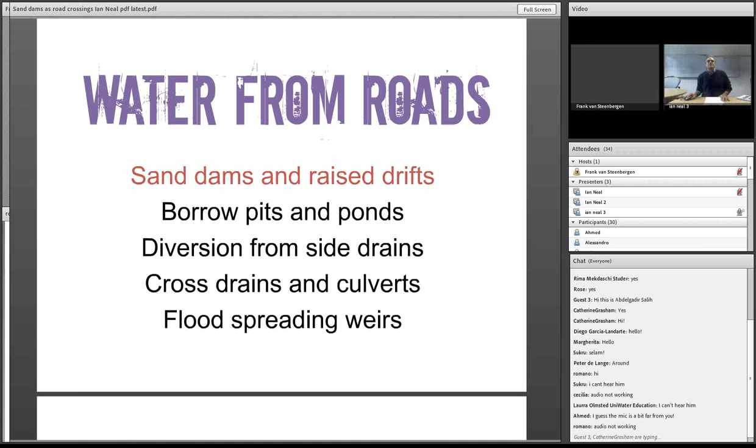So today we're going to look at what sand dams are, what is the opportunity and the scale of that opportunity, what are some of the benefits for local people and for road authorities, and later on we'll look at some of the barriers and enablers to wider adoption.

Hi, Ian, this is Abraham. Would it be possible for you to come a bit closer to your microphone, like you did when you practiced? Is that any better? Yes, I think it is. Can you hear me okay if I talk like that loudly? Yeah, I think we're good now. Yes, we are also getting some feedback that it sounds much better. Okay, please continue.

So what is a sand dam? This is a photo of a sand dam. It's basically a reinforced rubble stone masonry wall built across a seasonal sandy river. Since ancient times, people have been collecting water from sandy rivers. This technique builds on that ancient knowledge and enhances the sand aquifer. The principle is fairly simple: sandy sediment is carried down the river and collects behind the dam, where the heavier sand settles and the lighter sediment remains in the flow and is carried over.

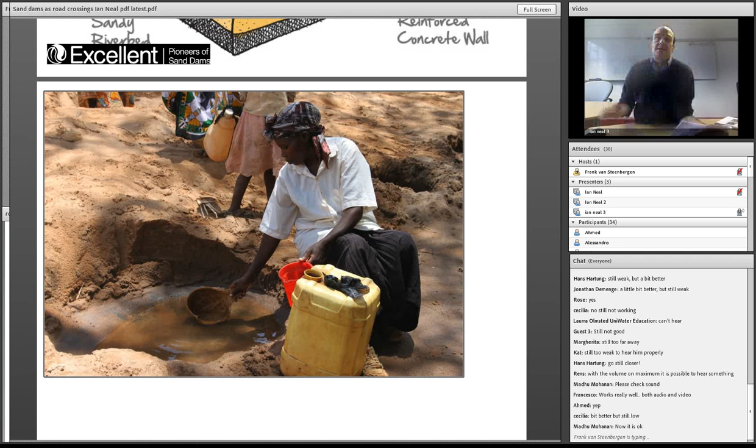So how do you get the water out of the sand? The simplest option is a simple hole scooped into the sand. If you've got livestock in the area, people often protect that water source using acacia or thorns to keep the livestock out. The sand dams are also used for irrigation. Here is a small shallow pond where the inlet for a pump would be put in, and water is pumped up to the surrounding land.

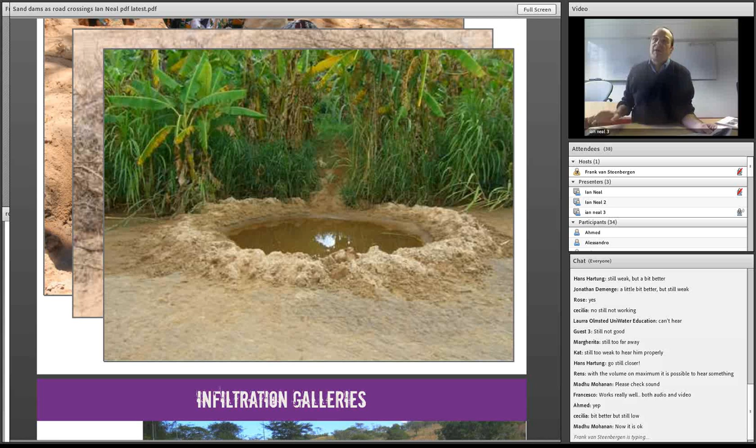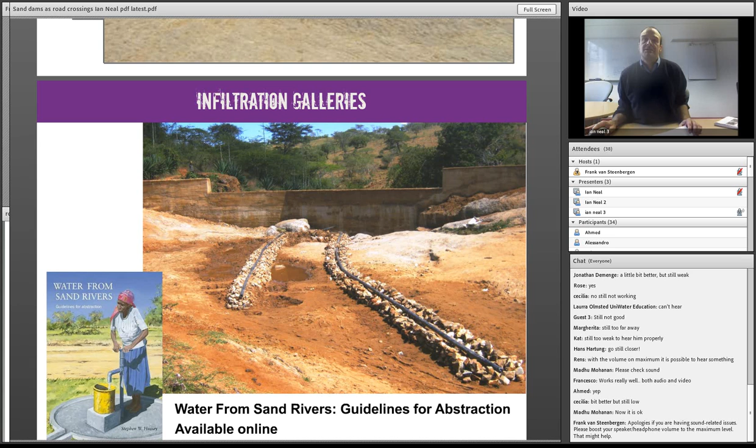You can also use an infiltration gallery, which is laid on the upside of the dam before the sand is collected. Water filters through the pipe and then collects into a shaft. There's a book on the left-hand side called Water from Sand Rivers, which has further information on different choices of infiltration gallery and pumps, available online. So that's the basic setup, where you've got a pipe laid into the sand, and water is carried off to an adjacent well, which can be abstracted by a hand pump or by a mechanical pump.

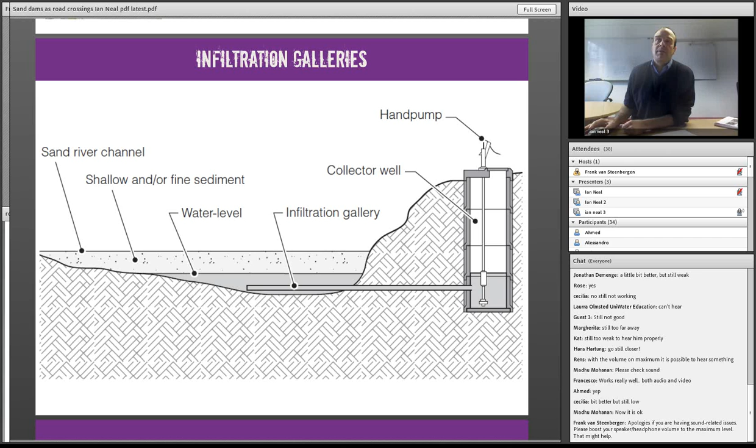One of the advantages of sand dams is that they help recharge the aquifer, and they also regenerate vegetation both upstream and downstream of the dam. That allows you to plant grasses for fodder and also bananas and so forth for additional income, but it also protects the riverbanks from bank erosion.

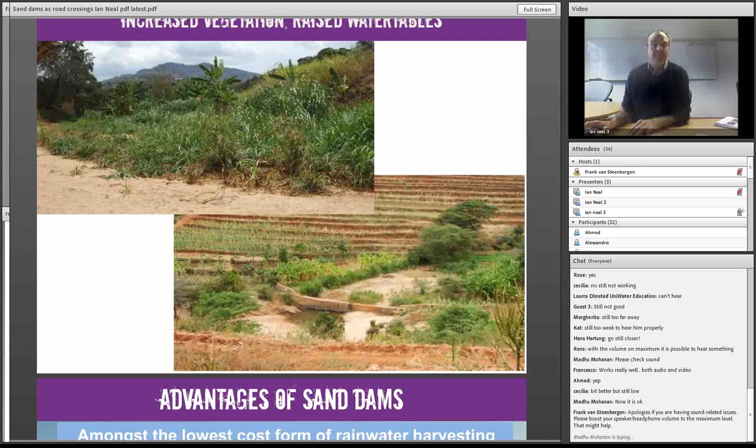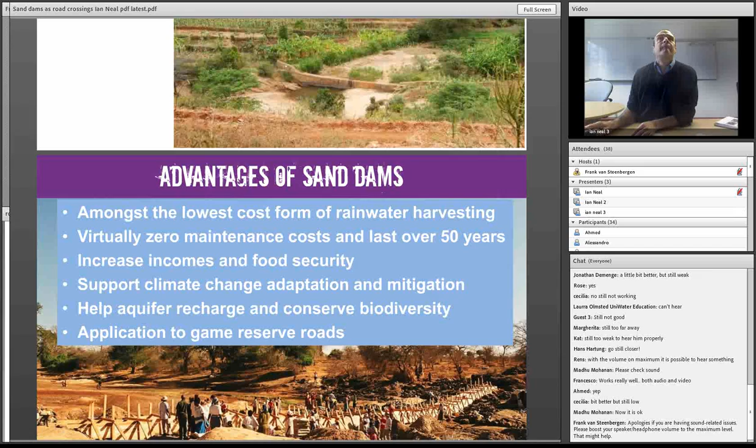Some of the advantages of a sand dam: it's a very low-cost form of rainwater harvesting, and once provided they're correctly...

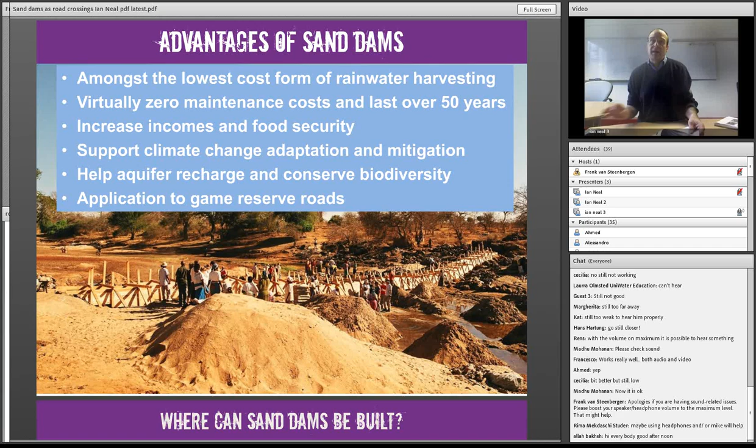Provided they're correctly maintained, constructed and designed, sand dams can last over 50 years, and that's one of the main advantages we'll come on to in terms of their use as a road crossing. They increase incomes and food security, can be incorporated into climate change adaptation and mitigation programs, and help recharge the aquifer and conserve biodiversity. They also have application within game reserve roads, whereby elephants can dig down into the sand to get water, and then other game can access the water that way.

So where can sand dams be built? There are four preconditions required for a sand dam. First, it needs to be on an ephemeral or seasonal river with clearly defined riverbanks.

Secondly, the riverbed must retain water, so you can tell whether that is the case. If you have the presence of scoop holes, that is an indication that the riverbed is retaining water. If you've got water in adjacent wells, again that is a sign that the geology is retaining water, with the water table close to the surface.

The third condition is the riverbed must have sufficient sandy sediment. We test sand by using - let me just show you - sorry, the pointer's not working, but on the right hand side there you've got a small portable stack of sieves and the scales, which will then translate to tell you the different grain size within the sediment, and that is an indication of whether you have suitable sandy sediment.

The next condition is that the bedrock or an impermeable layer needs to be accessible. You don't want to be digging too deep to reach a suitable foundation, so usually we would dig no more than 3 meters below the riverbed.

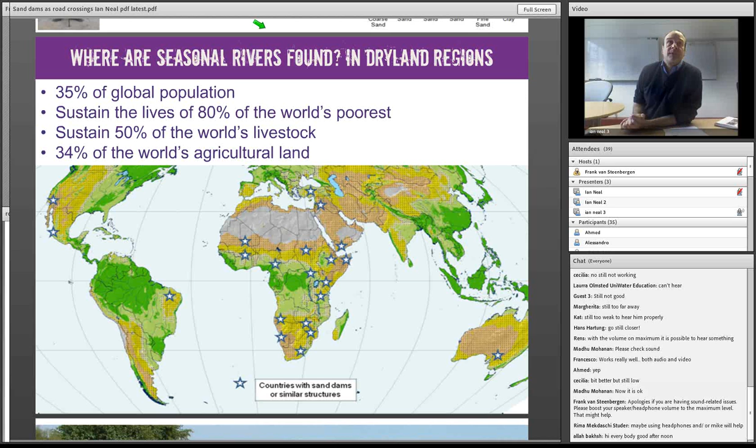In terms of the global population, 35% live in drylands, and it basically sustains 80% of the world's poorest people. It maintains 50% of the world's livestock and 34% of the world's farming land. These are figures from UNDP and UNCCD.

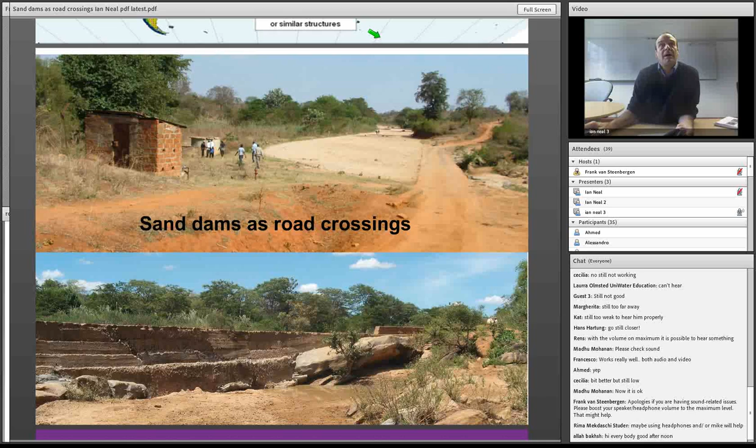So what is the opportunity? Basically, to combine sand dams with road crossings. Here is an example taken from Makueni County, which is in southeast Kenya.

Apologies, the tracker is not working again. So basically, this provides a year-round source of water, despite the fact that this part of Kenya only has a very short rainy season. A dam this size is about 80 meters wide and 3 meters high above the bedrock.

You can see below the dam, the spillway there is 3 meters above the bedrock. This stream is basically 24 kilometers in length, and just above the dam, it's 30 meters in width.

The dam basically supplies 2 schools, 10 water kiosks, and a health clinic, and is pumped at the rate of approximately 50 cubics every day - that's 50 cubic meters every day.

As can be seen, another advantage of sand dams is that they flatten the riverbed above the dam, which provides an important crossing for livestock and people.

Just to give you an indication of their cost, a dam of this size would use in the region of 800 bags of cement. In this part of Kenya, where cement costs around $9, the cost of materials for a dam this size is in the region of 10,000 US dollars, of which 60 to 70% consists of cement.

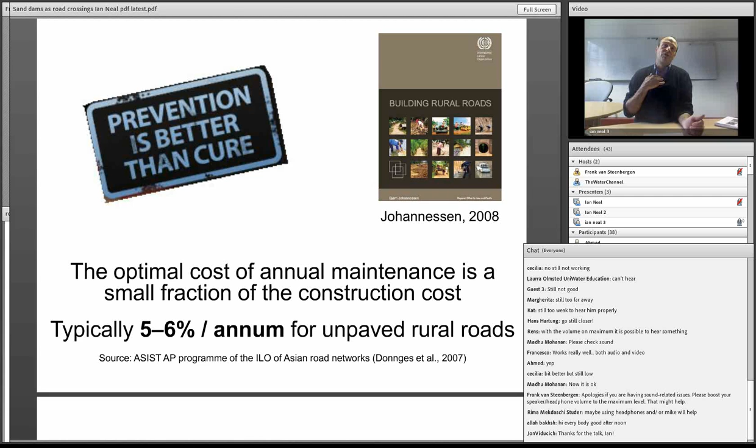So I just wanted to look briefly at some of the issues which face rural roads in terms of maintaining and upkeeping the investment. One of the main arguments for improved road crossings is that rural roads are not well maintained. There is not sufficient finance invested into rural roads, and so their maintenance and upkeep. As a result, in order to maintain the investment, you need to invest between 5 and 6% of your expenditure per year in operation and maintenance, in particular ongoing maintenance as opposed to emergency repair works.

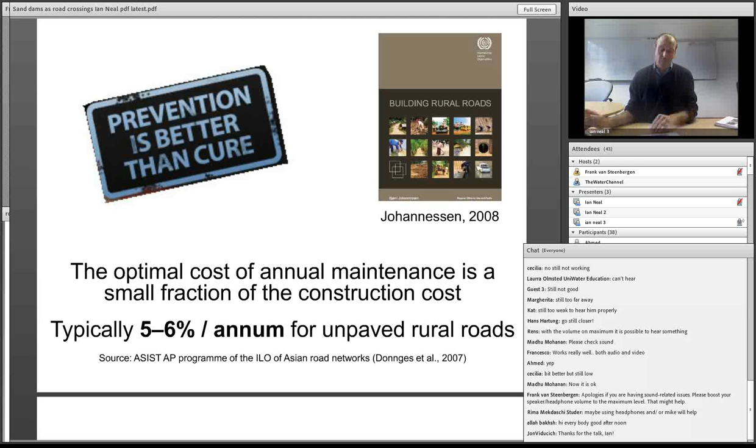Yet when we look at what actually happened in reality, this was based on a study of the Kenya Roads Board, which did a survey of the different conditions of road types according to their classification. And low volume rural roads, that's LVRR, 72% of these roads were in poor condition.

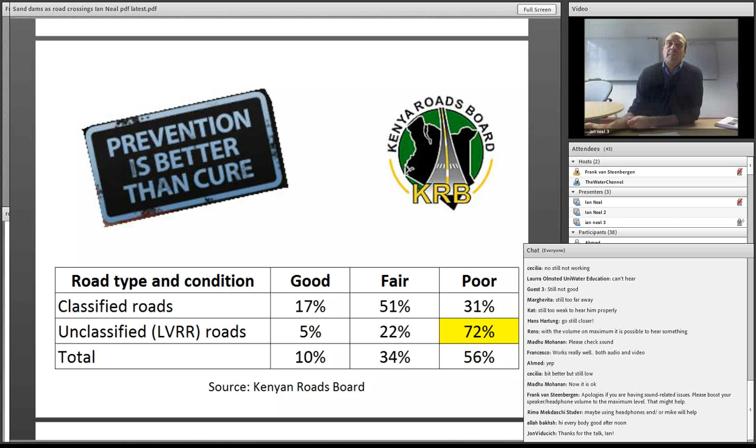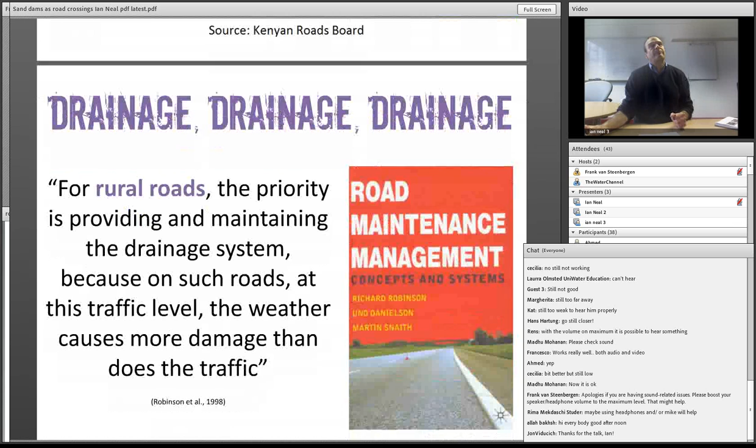Now, when you look at maintaining roads - sorry people, the tracker's not working very well - for main roads, the main factors there are around traffic volume, axle weight, and repairing the road surface. But in terms of unpaved rural roads, the key factors in road maintenance and upkeep is drainage, drainage, drainage. This is particularly true in dryland areas where the rainfall is characterized by short, very intense rainfall, which quickly runs off the surrounding land into the watercourses.

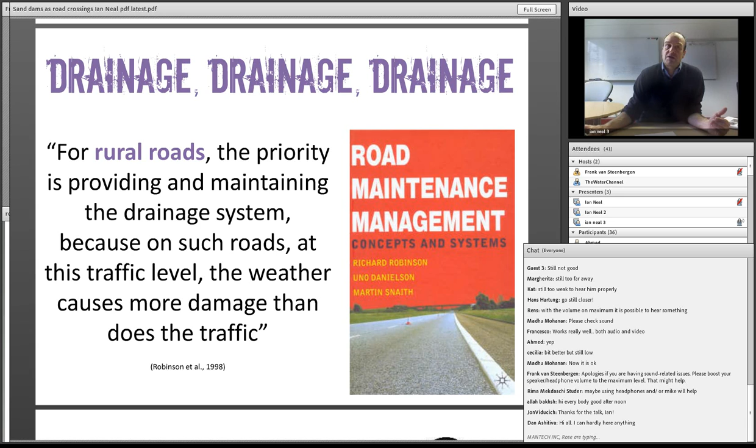And you get high flood levels and high sediment loads, which the road infrastructure has to cope with. This is perfect for sand dams, but it's not so good news for unpaved rural roads. In addition, road construction can also lead to erosion, gully formation, and the interception of subsurface flows. So when people are constructing roads, they need to be thinking about the impact on water flows and drainage.

Next slide I wanted to show you looked at a national taxpayers study of 17 rural roads projects in Kenya, and it found that well over half are either in fair or poor condition. And of the problems that were cited in the road projects - thanks Hans, sorry about my volume, I'll try and speak even louder - the inadequate drainage and damaged culverts were noted in all but 2 of the projects.

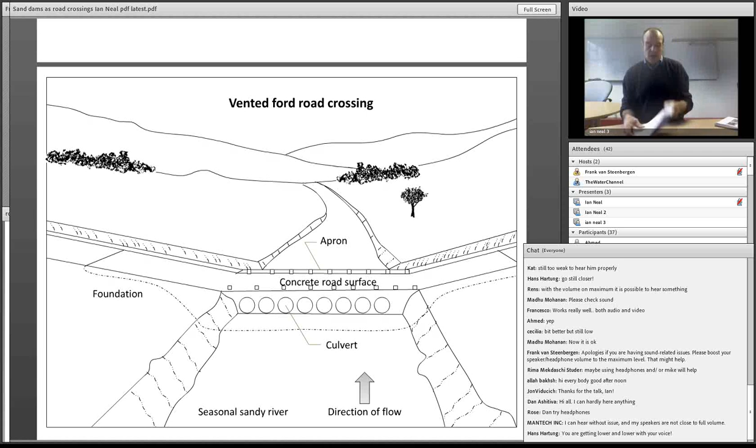So if we look at a typical culvert road crossing, then this is what it looks like. And these are some of the problems that are encountered in the operation and maintenance of these. This is why such crossings fail.

First of all, you have a lack of poor construction and headwall on the upstream surface of the crossing. Secondly, culverts get blocked with sediment and flotsam. And then another major area is that because the culvert gets blocked, the floods rise above the level where the road surface is paved, and that allows the river to spread and erode away the main road, damaging, completely washing away the culvert or diverting the river around it.

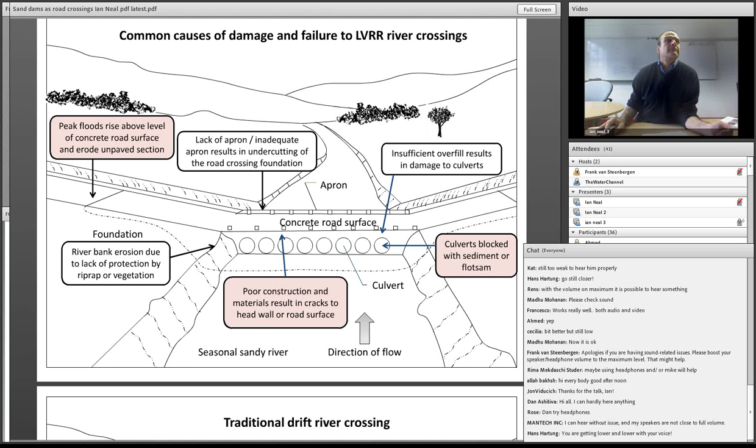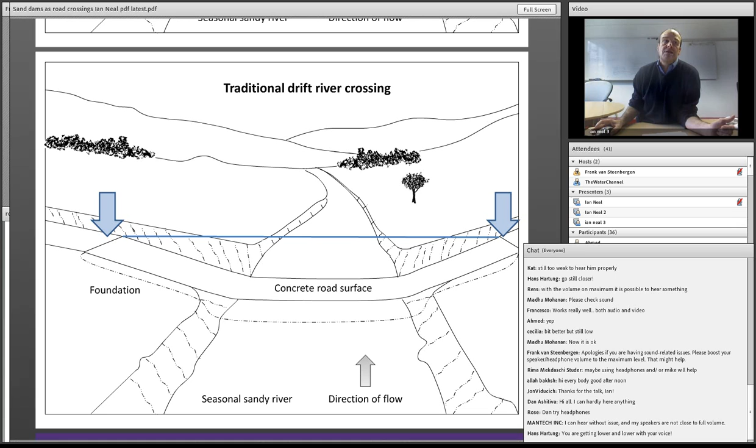The other alternative to a culvert crossing is a drift crossing. Similarly, if the river flood raises above the level where the paved section of the road finishes, then the road is vulnerable to be washed away.

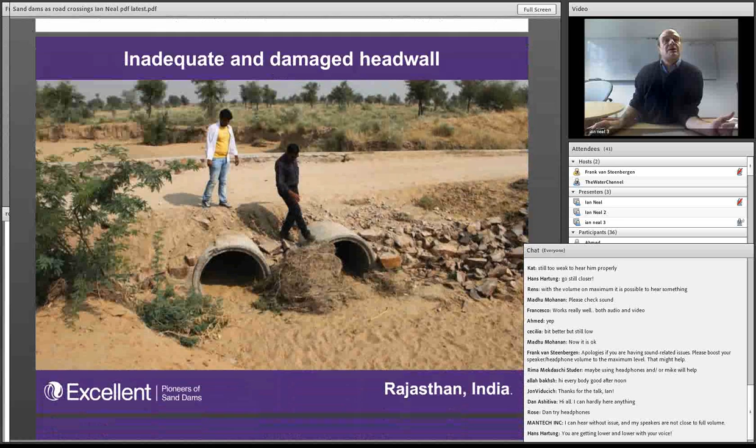And here we have some pictures which illustrate this. First of all, this is a picture of a culvert crossing with an inadequate and damaged headwall. With time, because there's a lack of fill over the top of the culvert, those culverts will crack and the road surface will be washed away. And the culverts themselves become blocked.

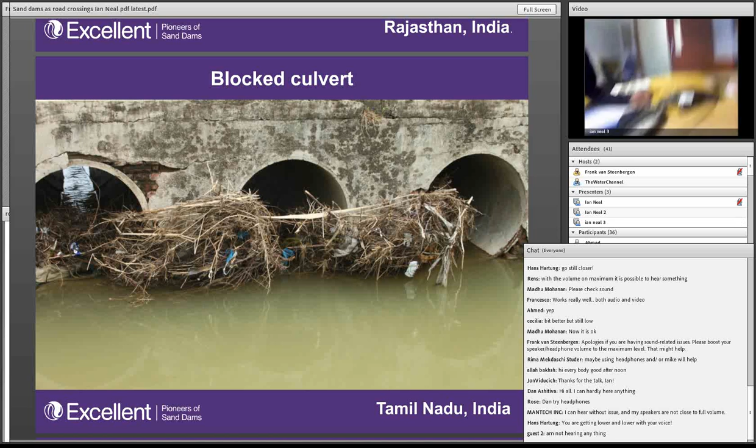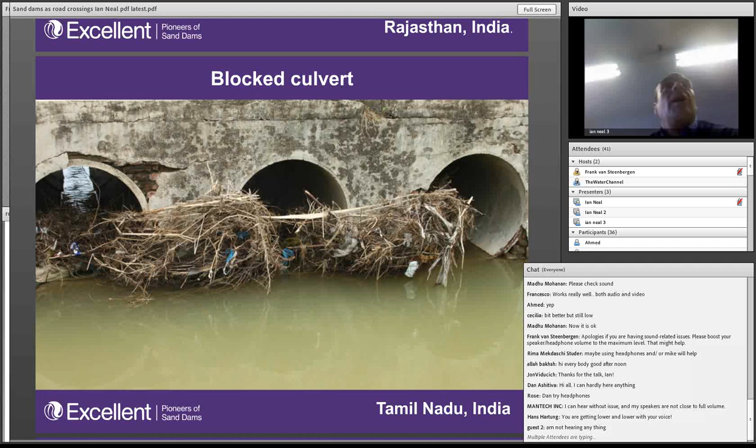Okay, so here is an example of how culverts get blocked. The third area is culverts cause the river to widen.

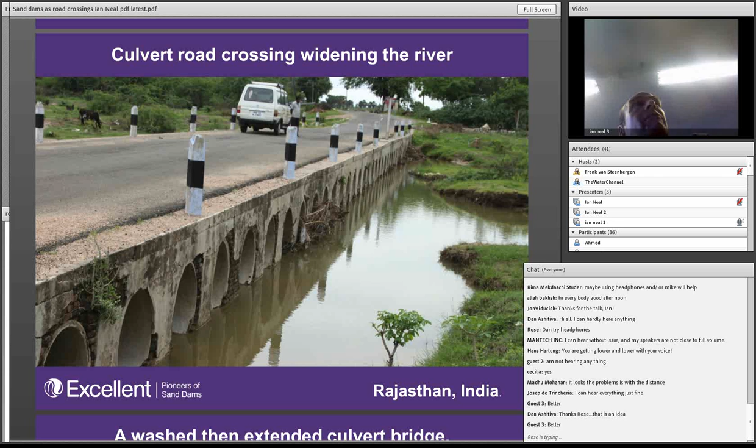Because the flow is restricted, the river will often spread wider, and where the capacity of the culvert is not sufficient, then it gets washed away.

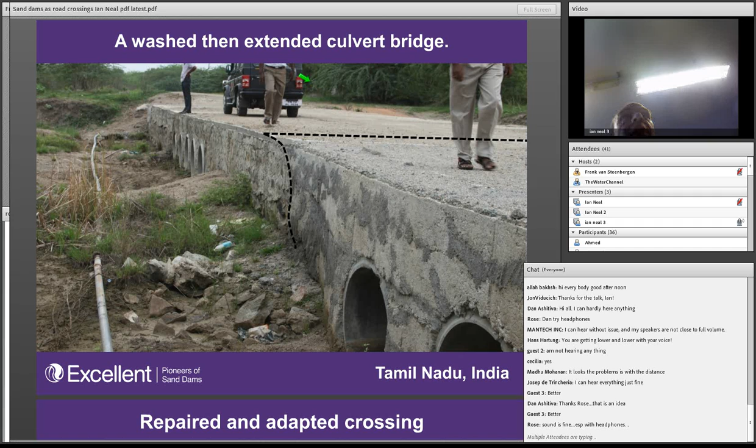So the pointer's not working, but basically on the left-hand side of this photo, that is a repaired culvert because it was washed away initially and had to be replaced. This is an example of where the capacity of the culvert is not big enough.

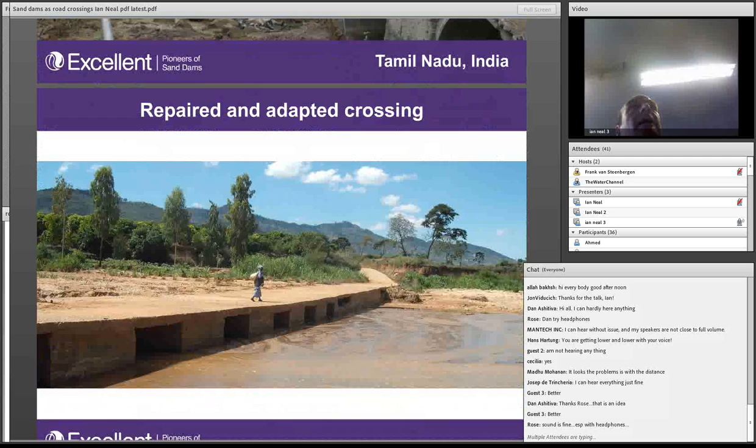Okay, switch that arrow off. Okay, this is a nice example, again in Makueni County in Kenya. Initially, the riverbank is where you can see the water level at the moment, about 20 meters past where the woman is walking.

But because the culvert didn't have sufficient capacity, and because the road didn't extend up above the flood level high enough, that whole riverbank got washed away. In repairing it, they extended the concrete road surface higher.

So you can see that in the far distance, that was replaced. The other interesting thing that they did is they blocked in all of those culvert openings, so it now effectively becomes a sand dam. And if you were to look to the left, sand has accumulated behind the dam. They've also planted grasses and so forth to bring the riverbanks back to their original position.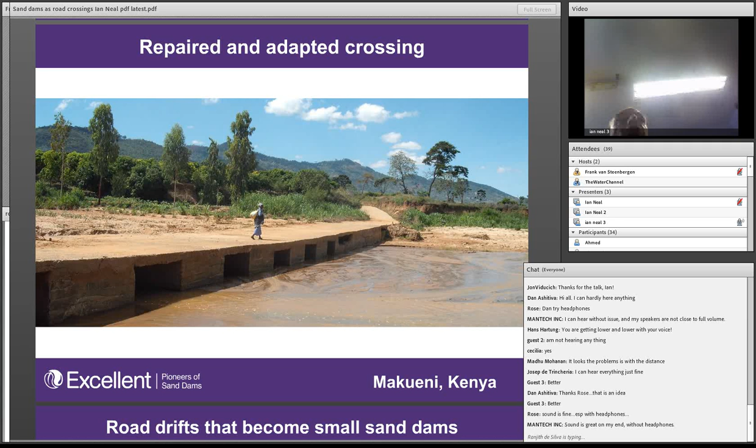Here's some other small examples of road drifts which have become small sand dams. Obviously, the opportunity here is to raise these drifts slightly higher so you collect more water and more sand.

Just to give you an example, the guy on the right is the Makueni roads engineer, Mr. Benson Masala, and he took me around and showed me the different road crossings that they've been building in recent years. Very well designed. He was saying that just in the last 3 years, between 50 and 100 of these crossings have been constructed.

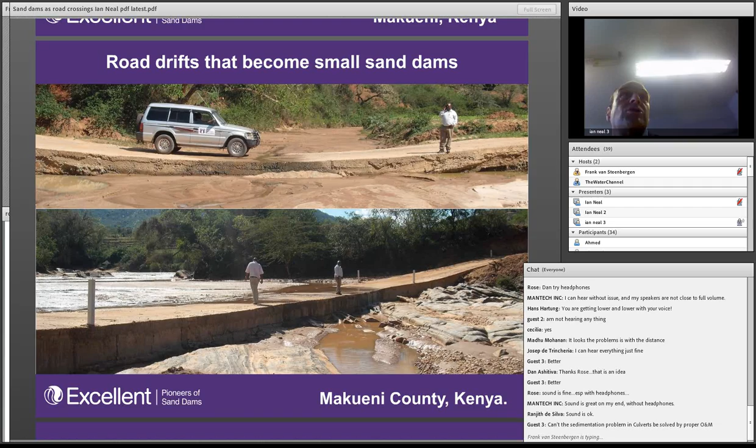The issue here is that there is no systematic collection of the water which gathers, and people aren't actually designing them in order to collect water. They're merely road crossings. Here's another example from Swaziland.

It started off as a road crossing, and all the sand has collected behind it, effectively becoming a form of sand dam.

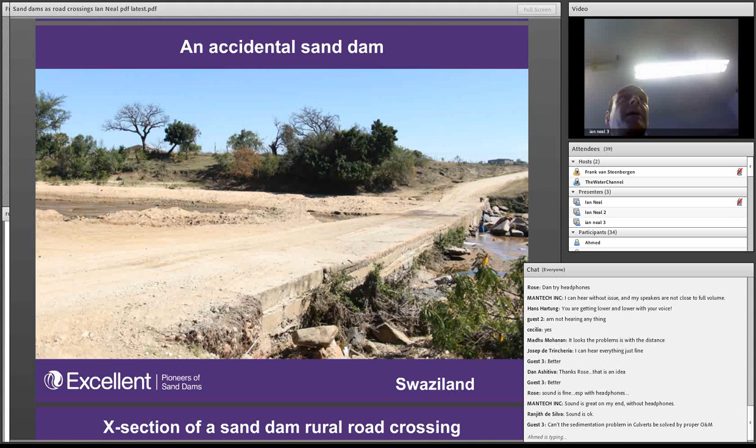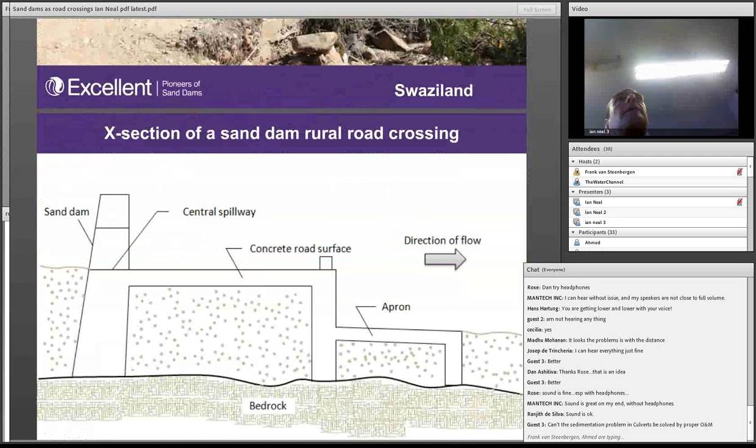Okay, so this is what we're suggesting a slightly revised sand dam rural roads crossing would look like. It's much like a drift, except it's raised up higher, so you collect more sand. And then you've got a spillway on the upstream face, which basically controls where the flood flows go within the main channel, and doesn't allow the river to spread and undercut the dam.

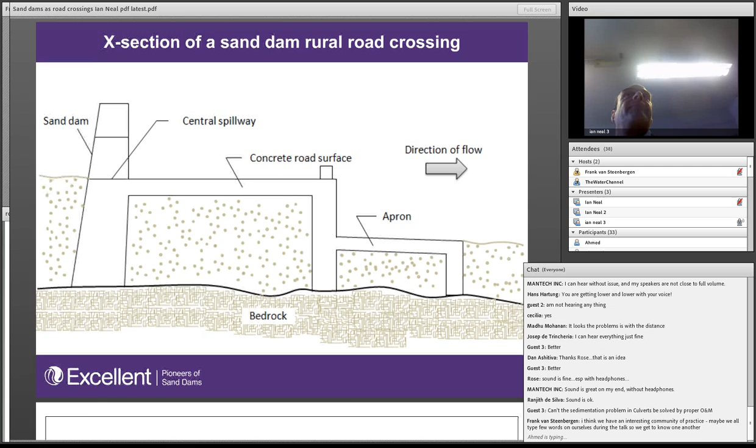Okay, there you can see another schematic. The central spillway maintains the main channel flow within the river banks, and then the second spillway maintains the annual flood. On larger rivers, you may well have a third spillway, for the lifetime or 50-year, 100-year design flood.

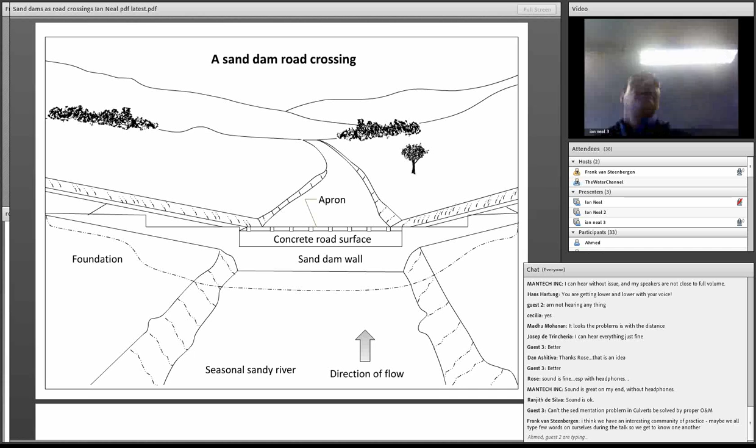Okay, that's how we design sand dams in Kenya. The only difference here is that you're incorporating a road within it.

And if we can just flag up, we've written a guide, second version of this, a practical guide to building sand dams. That's all around the siting of sand dams, the design of them, and the construction. We're not saying this is the only way to do them—this is how ourselves and the NGOs we've worked with in Kenya go about building them.

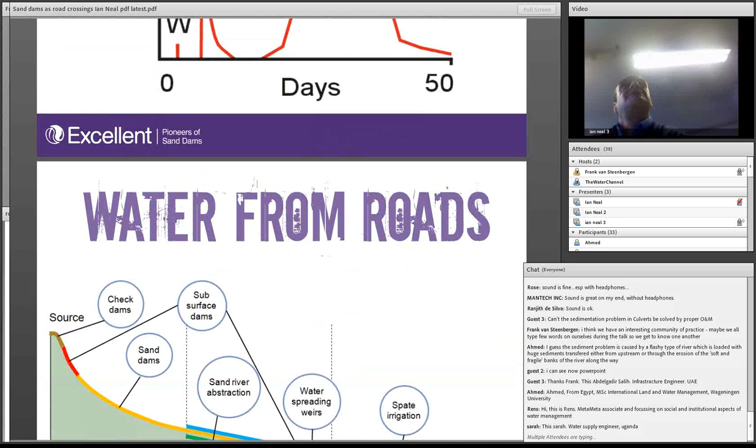Before I hand over to Frank, I wanted to flag that as you go down the catchment, you've got a whole range of different ways to harvest water from seasonal river channels: check dams, subsurface dams, sand dams, sand river abstraction - which is basically an infiltration gallery in a sand river without any dam - water spreading weirs, and spate irrigation. Sand dams are suitable to certain conditions, but not all, depending on the slope, rainfall, and catchment size.

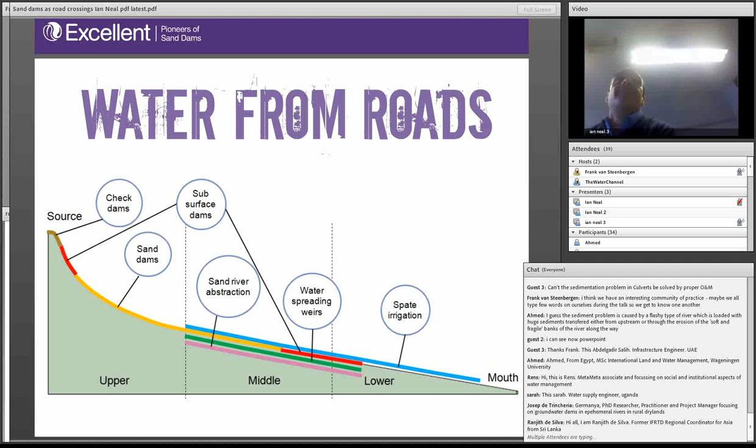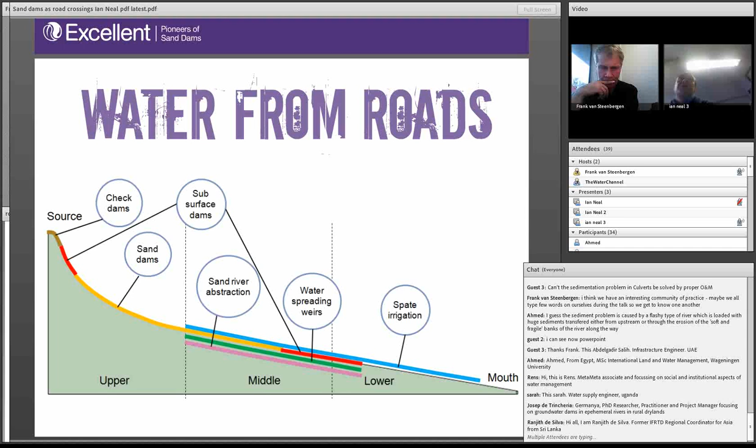With that done, Frank and I will come on to looking at some of the barriers and enablers to these technologies being taken up. Frank will also cover similar technologies of harvesting water from roads.

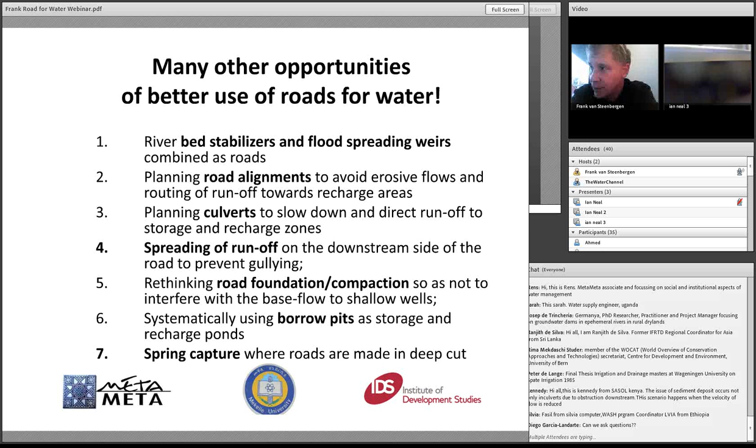Ian, I find your work really fascinating on the combination between roads and sand dams. We're also working on this, and one program we're very happy to be involved in is funded under UPGro, which we do with Mekelle University and IDS, looking at opportunities for making better use of roads for groundwater recharge and water collection.

What I'd like to do is take it from your presentation, Ian, and give a few quick examples of other opportunities. I'm picking up on your last slide, where you gave a cross section of a landscape showing different parts of the landscape offer different opportunities to make use of roads for water. So there's a list: bed stabilizers, floodwater spreading weirs, planning road alignments to avoid erosive flows.

Making good use of culverts - the cross drainage under roads - to slow down and direct runoff to storage and recharge zones, spreading the runoff on the downstream side of roads to prevent gullying, because gullying also depletes soil moisture and is usually a major setback for agricultural productivity.

Another thing is to look at the foundation of roads - often they compact and block subsurface flows through the landscape. Two other obvious ones: using borrow pits, which are used for building roads, as storage and recharge ponds, and the last one is spring capture, where roads are made in deep cuts.

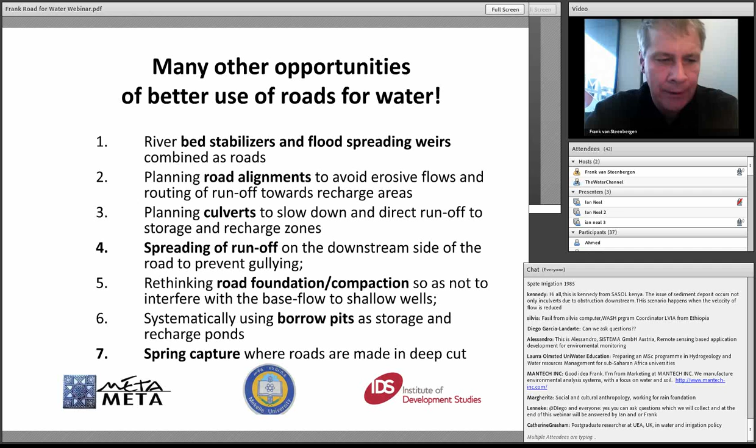Let me take you on a quick tour of the world, with a bit of emphasis on Ethiopia, where we're implementing the UPGro program. But first, Pakistan - I saw Allah Baksh among the crowd, I'm very happy. This picture was given to me last week.

Spate irrigation - you divert short-term floods in dry riverbeds for agriculture, groundwater recharge, livestock watering, many things. The main challenge in spate irrigation is how to divert these often violent floods from the riverbeds, particularly if the riverbed is very much rutted and gullied.

So road crossings can serve really well as a bed stabilizer. They stabilize the riverbed, so apart from acting as a recharge structure, as Ian explained with great examples from sub-Saharan Africa, they also basically stabilize the riverbed. If people want to make a diversion with soils, rocks, or brushwood, it's much easier to do when the riverbed isn't completely incised.

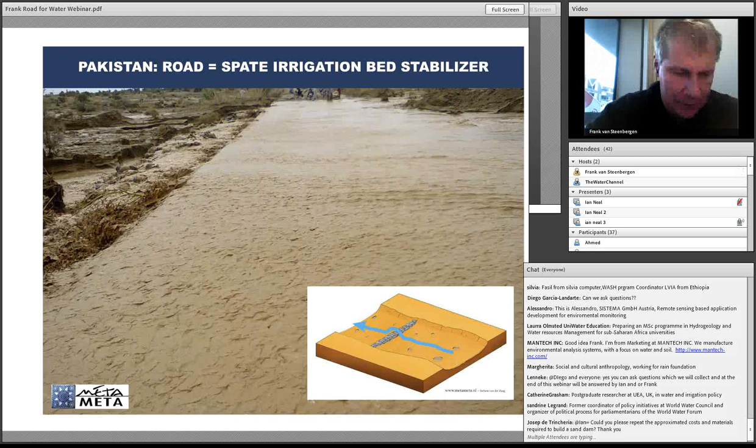Another example you gave in the cross section of the landscape is floodwater spreading weirs. Taking it a bit further, with this little diagram here, a road can serve very well as the centerpiece of a floodwater spreading weir.

Moving further, the impact of roads on soil moisture - I think this is quite fascinating. This is still in the sort of plain areas, and these are immense plains in South Sudan.

The slope is close to zero for large stretches of land. So a road is the only thing that affects the runoff, and the runoff comes in huge sheet flows. So what happens in South Sudan is that where you put the cross drainage, it really has a large impact on where the water remains for a longer time.

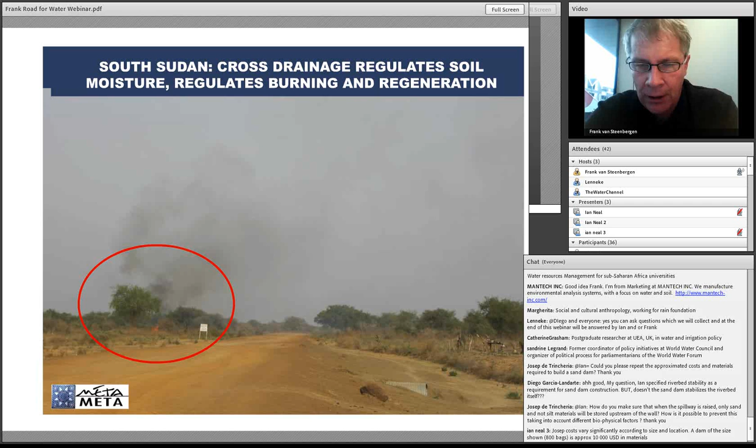Now, if the water remains for a longer time, it has a lot of consequences. Of course, you could say it's good for the groundwater, but in South Sudan there's also a tradition and scope to burn your vegetation to help the soil regenerate. So in this case, the road impeded the flood, and as a result, you cannot burn your vegetation in time. So this has a huge effect on your pasture lands.

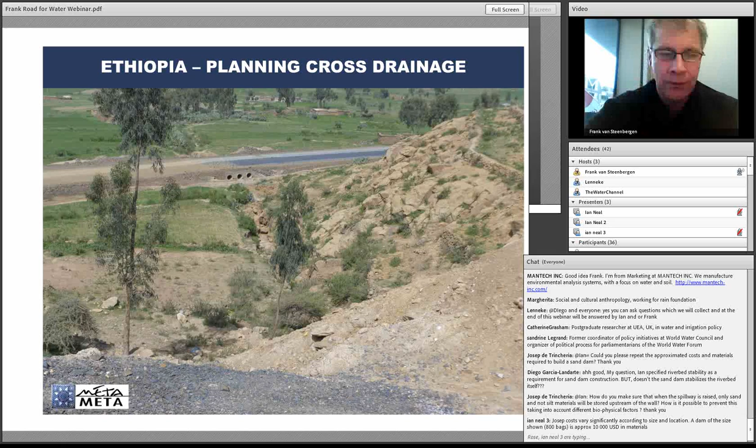This is another thing you can do - if you have water collected on one side of the road and being routed through the road crossing, then the culvert, you can also lead it, as you see in this picture, to infiltration trenches. These are the things you see in the first part of the picture. So the runoff coming underneath is really immediately converted into recharge.

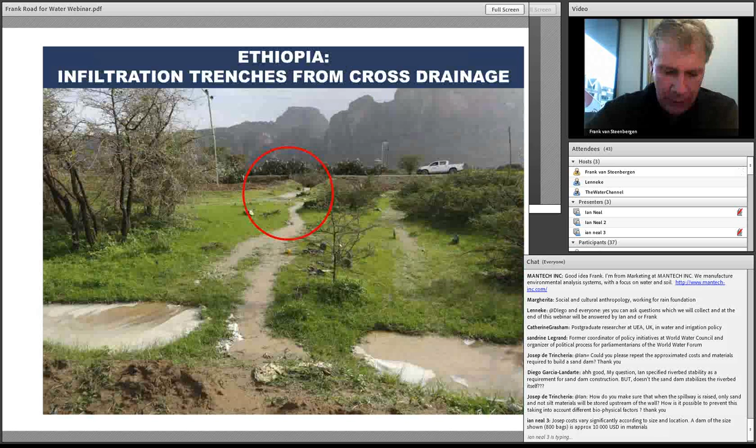Interestingly, as I was going home one day, because this is about 100 meters from my home, I found out that even here in the Netherlands, where I live, something similar is happening. Here they really manipulated the speed of the recharge by making very small culverts underneath the road, and then it gets into a swallow, and there it slowly infiltrates in this small pit, on the left side.

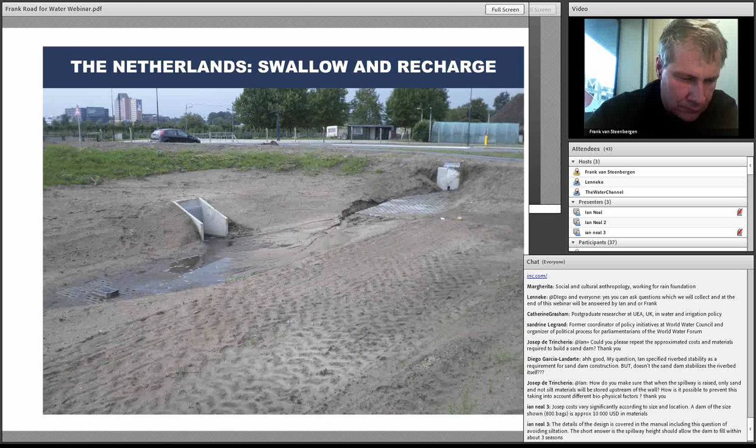And another thing is the embankment of the roads. So one is the cross drainage, where it ends up - how can you channel it to an area where it will cause recharge? The other thing, apart from the culverts, is that the road embankments often serve as a big impediment.

Usually, and I think this is one of the big issues, road engineers - they are road engineers, they are not multifunctional infrastructure engineers. So often you see, again this is from Ethiopia, water standing on one side of the road and land being dry on the other side. So it creates a problem on both sides.

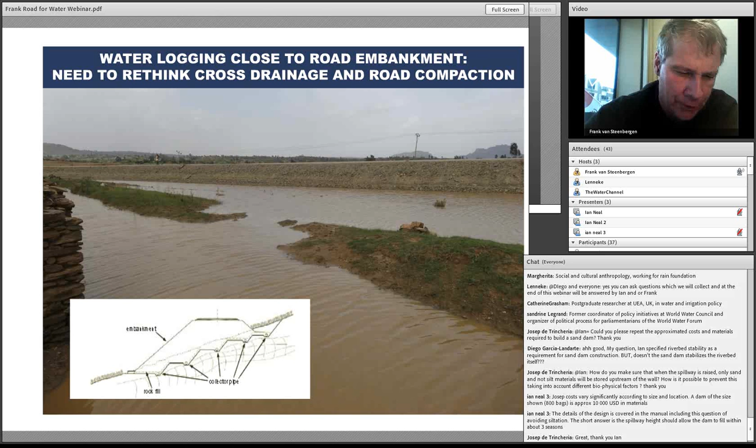So there's a lot of scope for rethinking - small cross drainage, and not having a massive compacted foundation of the road which impedes the opportunities for recharge and creates waterlogging on the other side.

What we can also do is make sure that the runoff from the road surface spreads gently, rather than gushing here and there. Stone bunds are very common on slopes, on flat slopes, but also along roads. They are a great invention. This is from Niger. So the runoff from the roads gradually spreads over the land, and serves soil moisture and also serves the recharge.

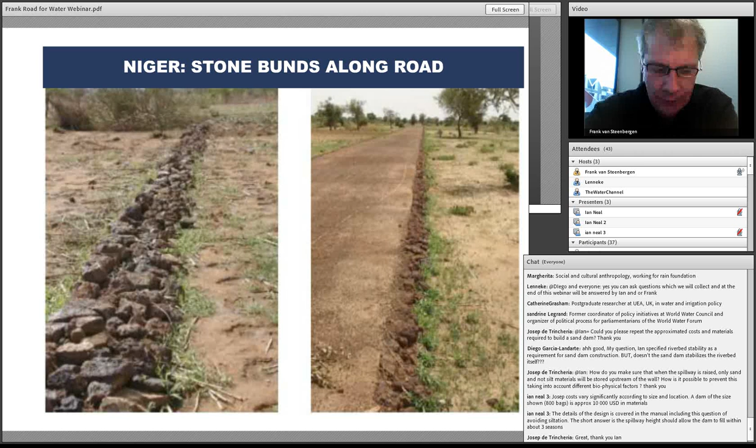Borrow pits - I think that's another opportunity we shouldn't miss. We have huge stretches of length, and often many borrow pits along the road. If you put them in the wrong place, they serve no use. But if you put them in the right place, they can be an extra storage facility, particularly in dry areas. I talked with a colleague from the Ministry of Water who had to evaluate a road building project, where people wanted to close down these borrow pits, and the local people were adamant - they finally had a source of storing water.

This is an example of a borrow pit which is the right thing in the wrong place. Well, it's not completely the right thing - it's just a very unregulated borrow pit, upstream. If it had been moved just 50 meters downstream, it would have been filled with runoff from the roads, and it could have served either directly as a storage reservoir, or as an infiltration pond.

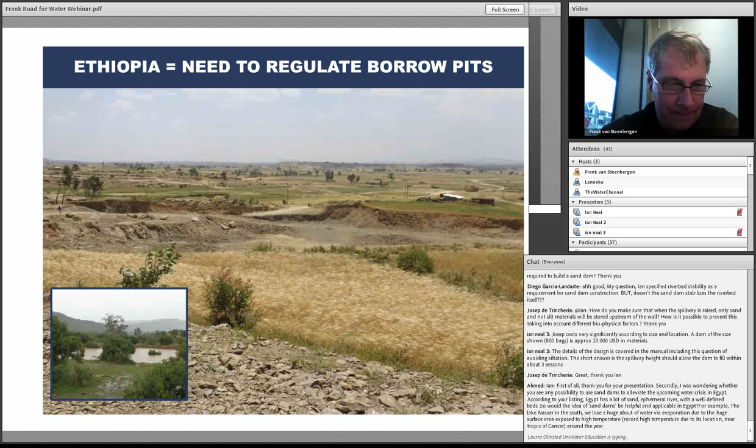In Yemen, there's very interesting work going on where runoff from the roads - and these roads are low intensity routes, because otherwise you have water quality issues - is used to fill cisterns, like you see here.

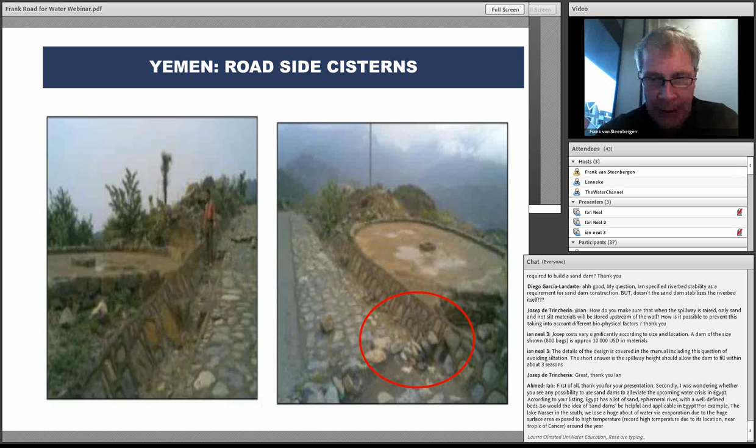This is the last example of maximizing road development for water and groundwater recharge. Often, if you make roads in mountainous areas, you open up a lot of springs - you cut through small water veins - and you can do two things. If you don't handle this, it will be a constant source of damage to the roads. If you collect them in a reservoir, you can use them for drinking water or irrigation. Again, one example of trying to maximize the road.

Before I hand over to Ian, this is the discussion on barriers and enablers. Ian will take over from that, but I think there's many things we need to do better.

One thing is that road design now is monofunctional and non-participatory. Basically, there's no process of taking into account that the road is not just a means of transport from point A to B, but something which affects the whole socioeconomic setting around the roads. It provides some people access, other people no access. It has a huge impact on your agriculture, on your water availability. So I think one of the big barriers we need to overcome is that road design is now monofunctional and non-participatory.

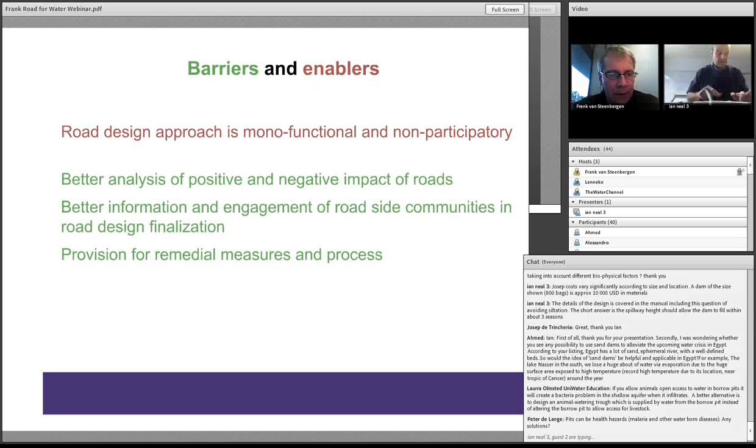So I think this really needs to be revisited. The whole road designing process needs to be done differently, and we need to look at the positive and negative impacts of the roads. There's a much larger need in the road design process to engage roadside communities in the design of the roads, not only looking at them as a stretch of tarmac, and also make sure we have better provision for remedial measures and processes. So with this, I want to hand over back to Ian.

I will answer some of the questions that came in, and Ian will continue explaining the different barriers and enablers that are there. Thank you very much.

Ian? Yeah, hi Ian, are you still with us? Ian is just working on his microphone, trying to make it sound better. And yeah, he's back. Can you hear me now? Yeah, yeah, yeah, we can. Great, okay, sorry about that.

Apologies for the sound. I just wanted to run through some of the barriers and enablers to wider adoption of these different techniques for harvesting water from roads. I'll talk about some, and then Frank will come on to the more political and social issues. The first barrier is the use of standard designs - if you understand the history of how engineering institutions spread from the UK and US to different parts of Africa, you'll be familiar with how a lot of standard designs are based on experience in the US or UK and are not adapted to drylands hydrology or climate. So people are considering technical solutions which weren't necessarily designed for Africa, and there's a need to make sure that they are.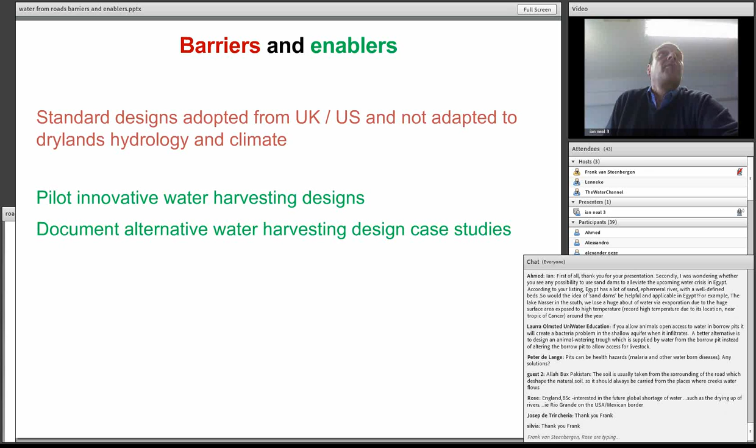So some of the ways you can do this is just to pilot different innovative water harvesting designs and record that evidence, then document different case studies of water harvesting.

Work with professional engineering and roads institutions and public works authorities to ensure that standard designs reflect the climate and hydrology where they work. One of the challenges in drylands Africa is the lack of good climate and hydrology data, so you have to find different ways around those challenges. People familiar with water harvesting have that experience, and the best road authorities do too.

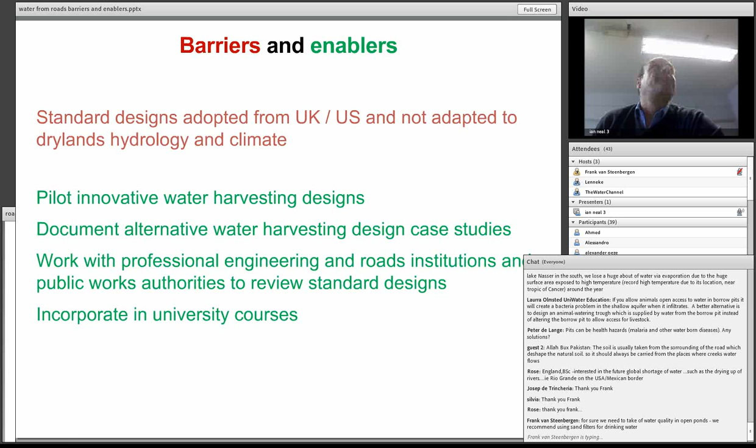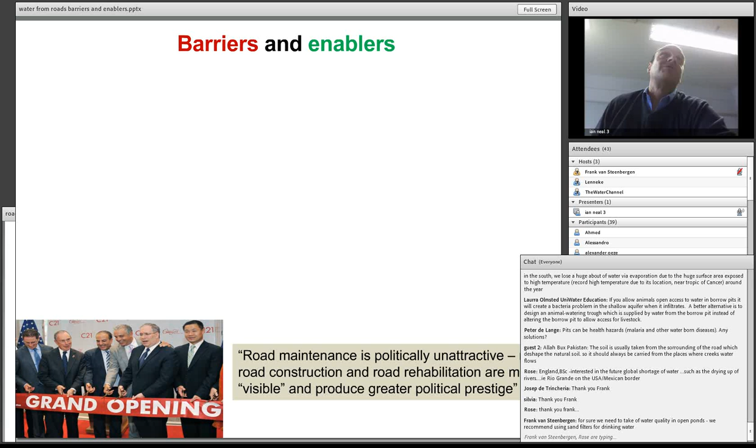Incorporate that learning within university courses and professional training so it gets embedded within the system. The second key barrier, and possibly the most important in my experience, is that politicians and civil servants love to cut ribbons. They love to open things, and I just wish we had more celebrations of infrastructure, like a 10-year anniversary of infrastructure, rather than just the opening.

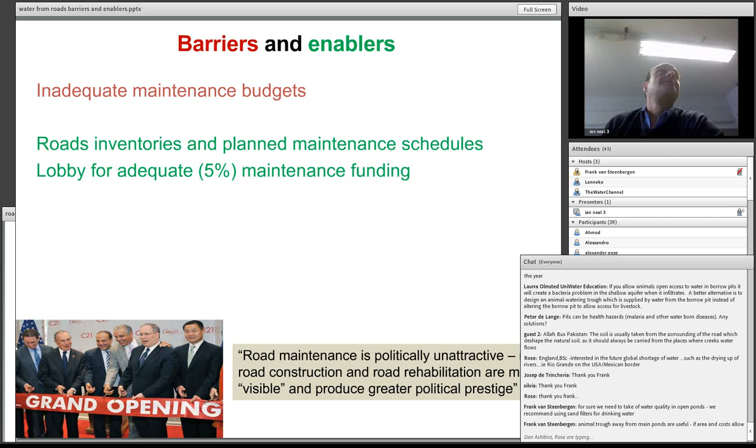Some of the key barriers in terms of funding are inadequate maintenance budgets. To get around that, have a roads inventory and planned maintenance schedules. The second is to lobby for adequate funding for maintenance. There's a very interesting fact showing that over the last three decades, $150 billion has been invested in roads infrastructure, but $50 billion of that has now fallen into disrepair because of inadequate maintenance. I can send you some of the details if you need to make the arguments.

A key area of making the maximum opportunity of better roads and better water harvesting is cost sharing and collaboration between roads, water and agricultural authorities, and cross-subsidisation from water revenues. As the example I showed in Kenya illustrated, you're generating income from water sales from water kiosks. Is there an opportunity for some of that funding to be channeled towards the upkeep of the road crossing itself?

Water harvesting road crossings cost slightly more than the standard design - not a lot more, and further research is needed to understand those costs better. But to make the case for investing in better road river crossings, we need to share the costs with water and agricultural authorities and the beneficiary communities. Use of labour-based methods allows beneficiary communities to contribute their labour.

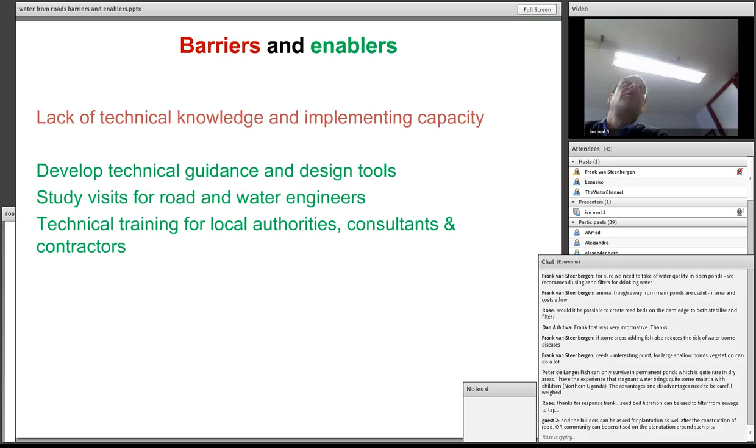Another barrier to wider adoption is a lack of technical knowledge and implementation capacity. Contractors are inclined to stick with methods they're used to and familiar with. If new methods are to be trialled and introduced, there's a need to invest in training and tools to allow people to try different approaches themselves - developing technical guidance and design tools, organising study visits between roads and water engineers so they can learn from each other, and from one district to another, one country to another. Technical training for different stakeholders - local authorities, consultants, roads contractors and so forth.

Finally, from my point of view - and Frank's going to come on to this - how do we raise understanding and awareness of this potential? We need to better understand where the different methods and approaches we've been discussing are applicable - what climates and biophysical conditions, slopes, catchments, terrain, and geology suit different forms of rainwater harvesting. We've done some work on that, and we're keen to learn and work with others on that.

The next area is using that information to map the areas of greatest potential for harvesting water from roads, and to develop national prioritized plans for implementation. Document successful and unsuccessful case studies so we learn from that experience, and then wider advocacy and influencing amongst a whole range of policymakers.

So we're not just talking about roads policymakers, we're talking about water, agriculture, and livelihoods policymakers.

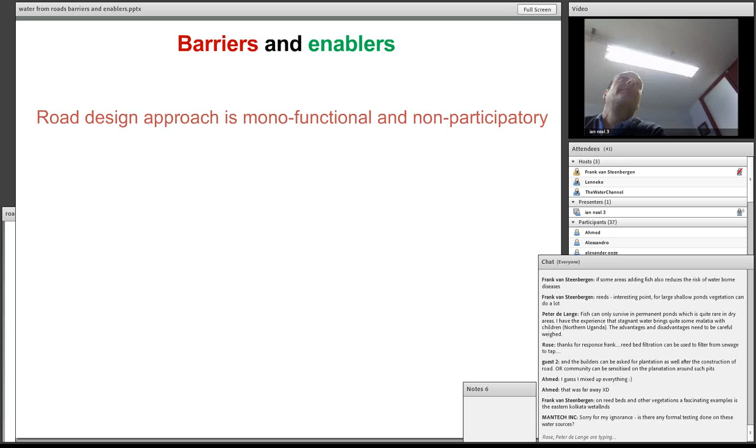And then, if I can just... this is Frank's slide. Frank, do you want to take over, or are you happy for me to continue? Because I understand what you're saying here. Okay, let me say, Frank, with your blessing, I will basically make the points you've got here.

Absolutely, there is need for a better analysis of both the positive and negative impacts of roads. We mentioned earlier that roads can have a negative impact - they can lead to greater erosion, they can reduce water availability - but we've also seen how they can make many positive benefits as well.

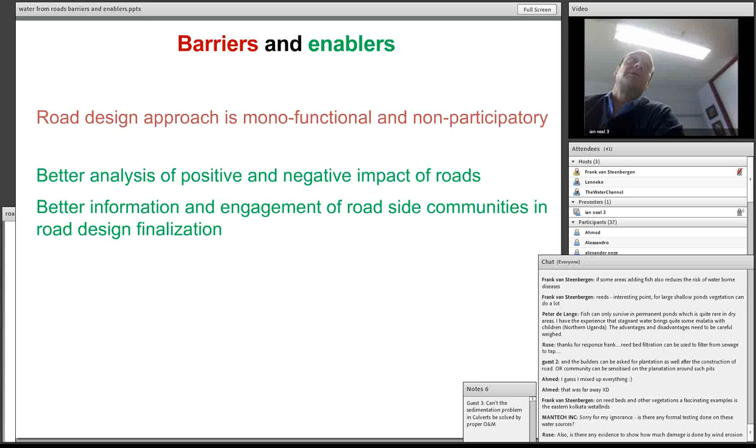This is absolutely critical. In order for people to see the benefits and potential of harvesting water from roads, roadside communities must be involved in road design, and involved as much as possible in decision making and implementation, so that they have a sense of ownership for the infrastructure and can ensure that the design fits their needs.

Simply said, but harder to achieve. It just keeps getting repeated that local communities are not included in the design decisions.

Provision for remedial measures and the process of that - this is one of the advantages where there has been damage to roads and road river crossings. You have an opportunity there to revise the design so it can form more of a water harvesting function. I gave the example where initially there was a road crossing and the culverts were filled in, and then once those culverts were filled in, the road crossing functioned as a sand dam. There are similar opportunities there.

Another example: if you channel the water away from side ditches or cross ditches, then the capacity required for side ditches is less because they're carrying less water, plus you get the benefits of the water harvesting.

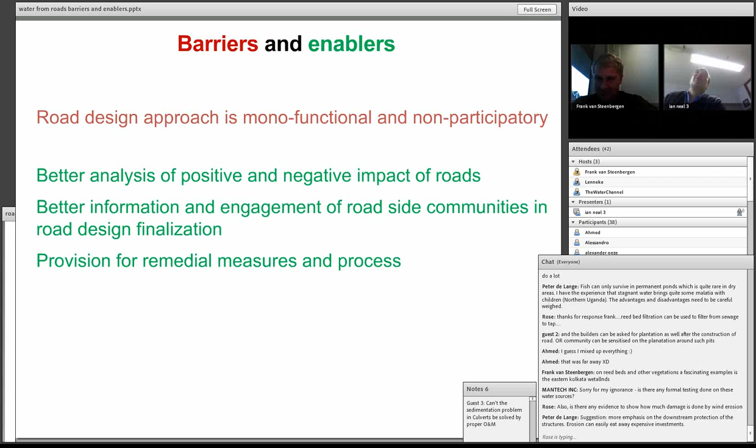Frank, I'll hand back to you on that one, whether you had further points to make on that slide. But for me, that's just a whistle-stop tour of some of the barriers which are inhibiting us, but also some of the steps we can take to overcome that. Okay, over to you, Frank.

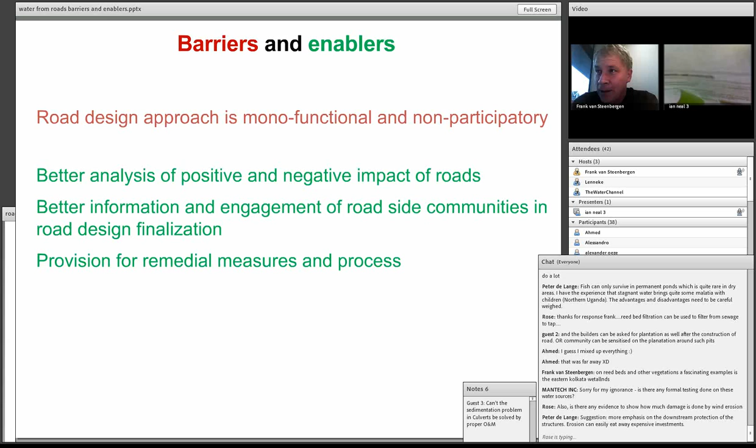Yeah, no, Ian, I have nothing to add. I think this is quite a package that we have to work on, but the potential is also enormous. Adding the water component to road design could make enormous impact on groundwater recharge, water harvesting, and water availability, at very little cost. And if you see the amount of work going on in road building these days, that is much more than the investments in water and water harvesting. So I think this is a huge area to work on, and your list of opportunities and barriers is very good. Thank you.